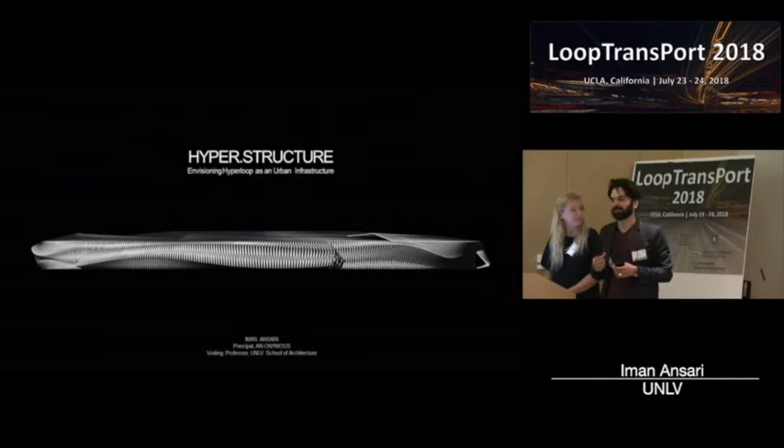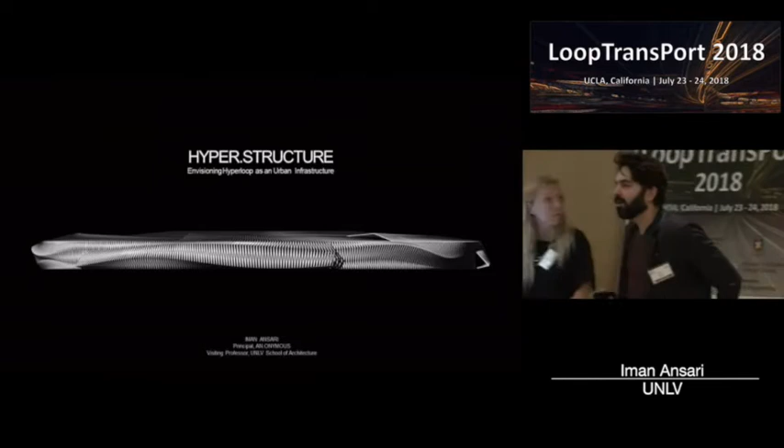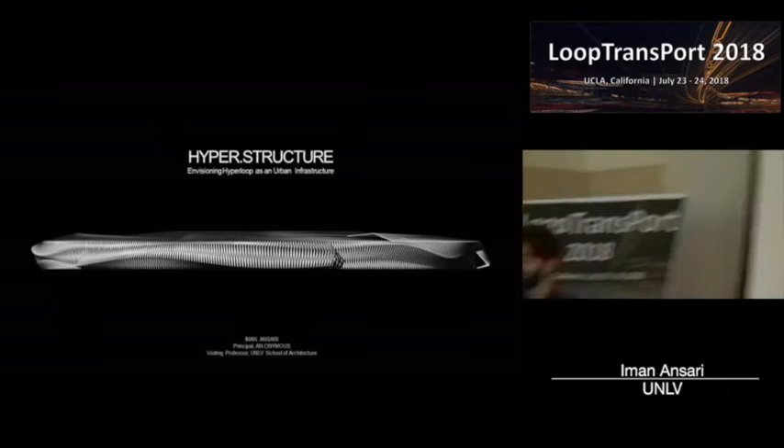I've seen a lot of great presentations today, and what kept me thinking is that it's a little bit strange for us designers and architects to be in a scientific conference. But I keep thinking about Heidegger, who famously said that unlike the notion that we have science and then there's technique to prove it, sometimes there is technique that would then lead to scientific discovery and findings.

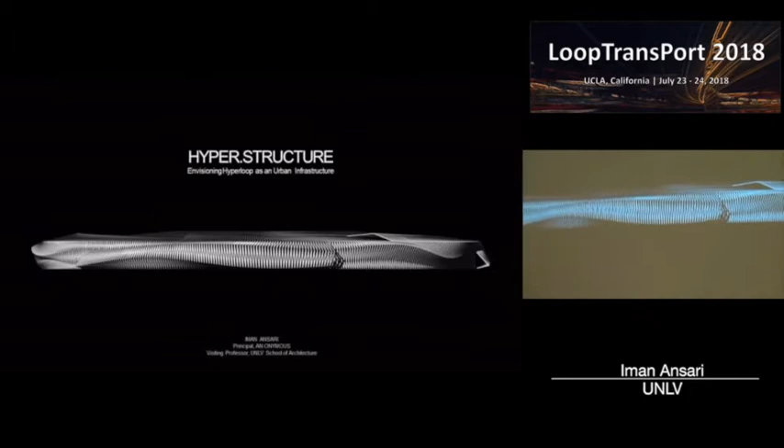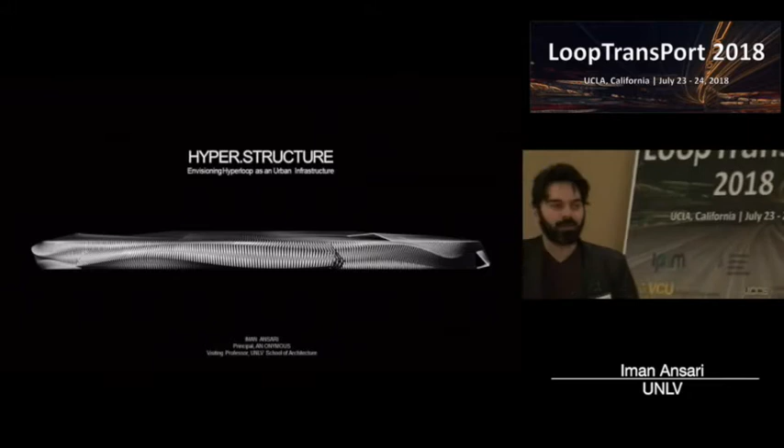So this has been our approach at Anonymous as a transdisciplinary design firm, to explore this narrow realm of techniques, and that has enabled us to work with great companies like NASA JPL and more recently Hyperloop Transportation Technologies. So I want to begin with this image.

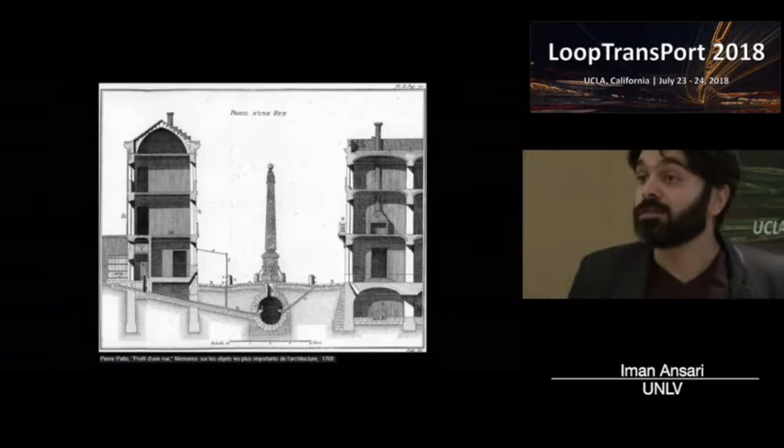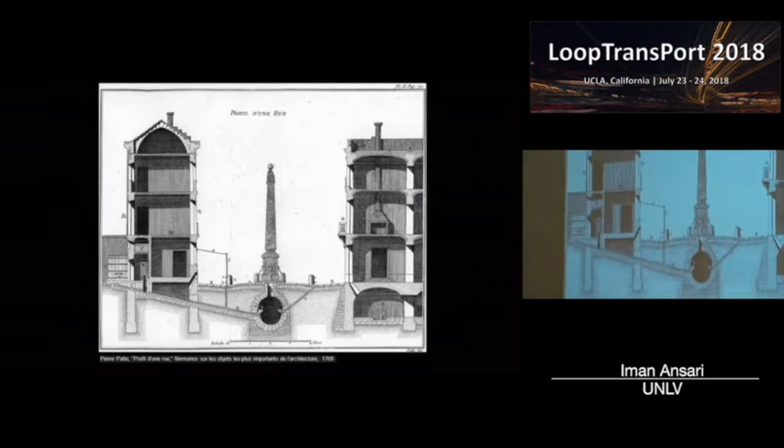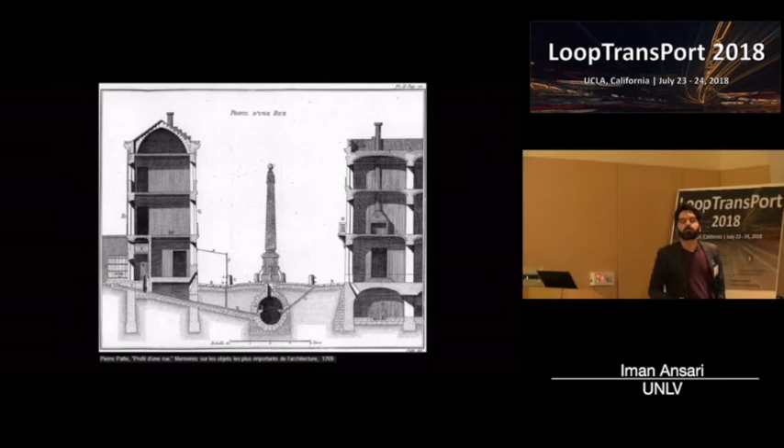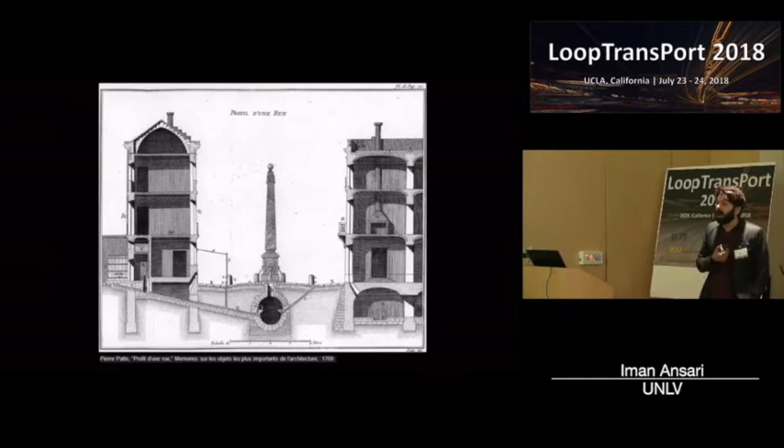By Pierre Patte in 1769, of what he called a street—not any particular street, not an existing street, but basically any street that he envisioned back then. Patte thought, well, if we have circulation on the street of people and carriages and vehicles, how about we also produce a completely separate and autonomous system of circulation underground for water and sewage that can even connect to the buildings and tie it all together in a system. It took 100 years after this drawing for this to be realized.

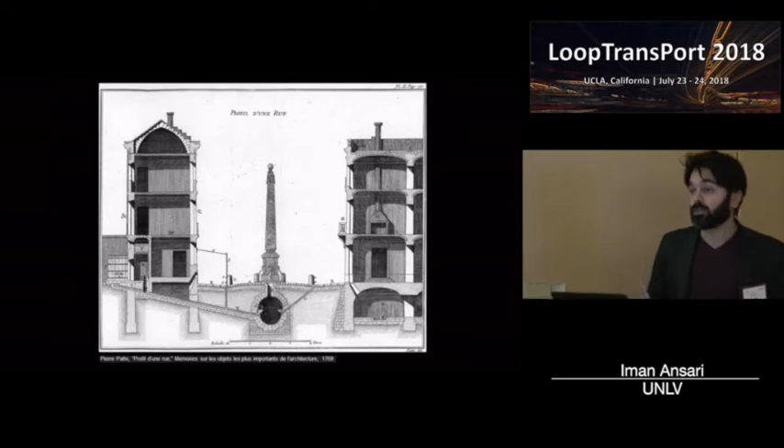But we see the idea of something like a street that already existed, but beginning to be thought of as an urban infrastructure. And since we started working with Hyperloop Transportation Technologies, we thought of Hyperloop in a similar way: instead of coming in to make it look pretty, our job is to rethink what Hyperloop is beyond just a mode of transportation and mobility.

So beginning, we worked on a number of separate projects with HTT, and one of these was the task of rethinking and redesigning the pylons, assuming that the tubes are above ground.

So early on we thought of approaching the project, and we called it Hyper.structure, so that the idea is not that we think of pylons just the same way as the elevated highways of the 1950s and 60s have been, and we know what happened to that. But we really think of it as a new urban infrastructure that could bring new forms of life.

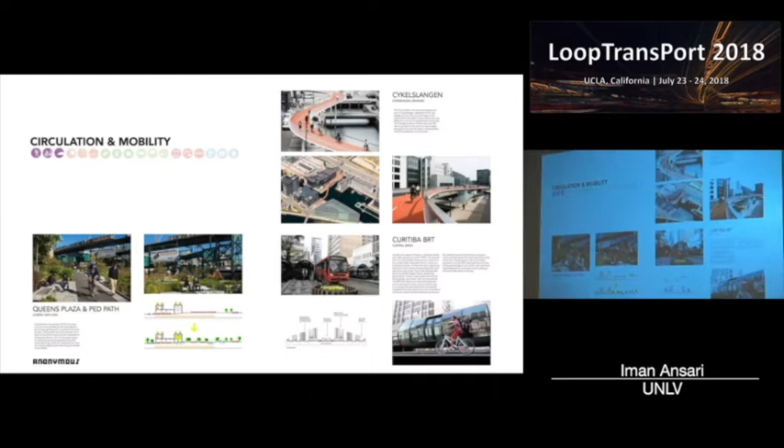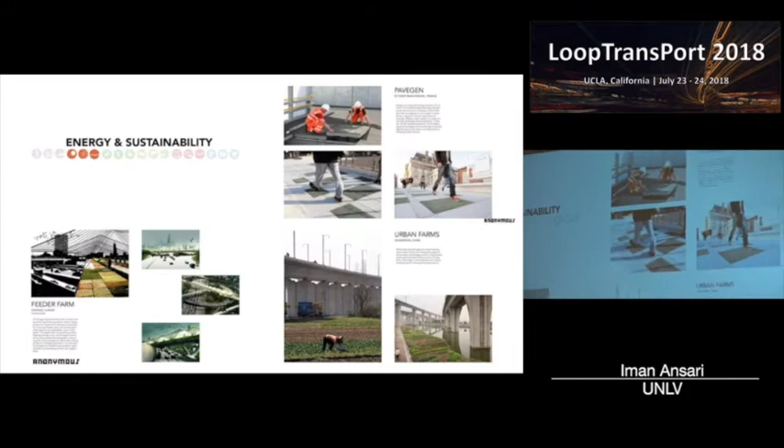So we started researching, looking at different aspects that we were interested in, from circulation and mobility, which is the obvious one, to energy and sustainability. We looked at separate projects, how to even generate energy from pedestrians moving and walking. We looked at program and economy and how to activate spaces, green and urban spaces.

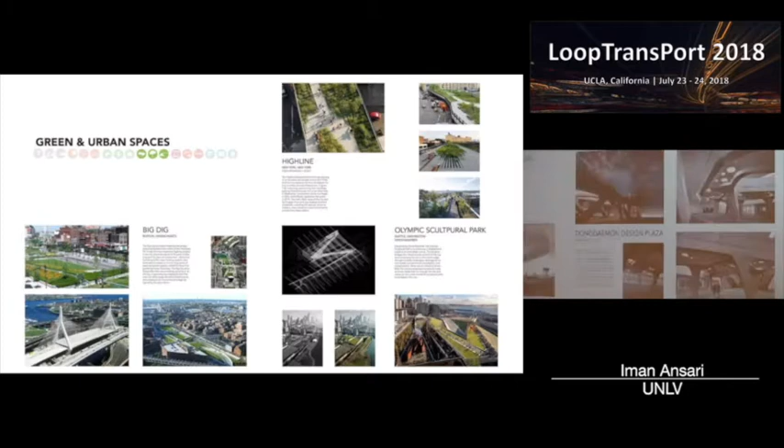How could these spaces become more positive public spaces in cities? The idea of structure and infrastructure itself, and how that could function.

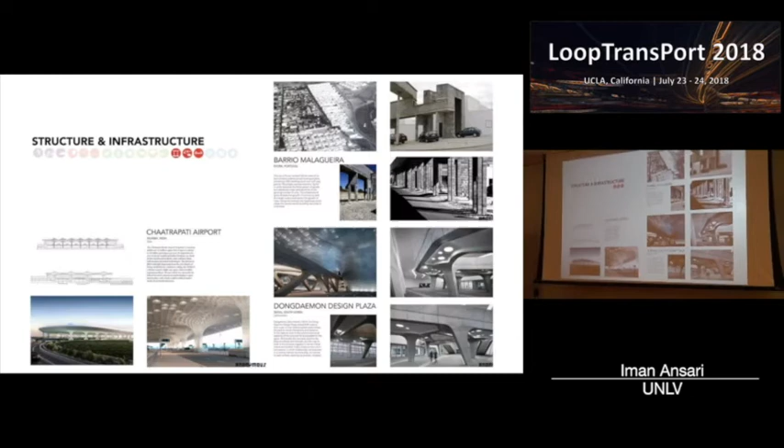We have case studies here in Portugal, where a city was developed by building elevated infrastructure that carried pipes and electricity first, before there were even any homes, and the homes were built by just plugging into it. So in a way, you can think about the pylons and the Hyperloop tubes in the same way, as a means for future urban developments.

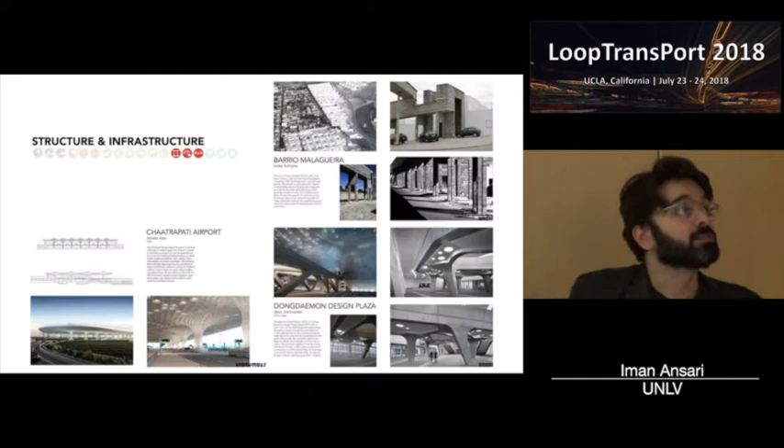Also culture and community, and how these spaces could foster that.

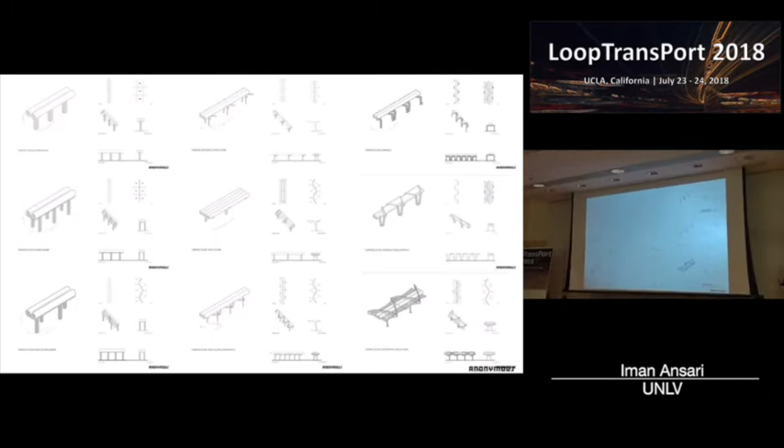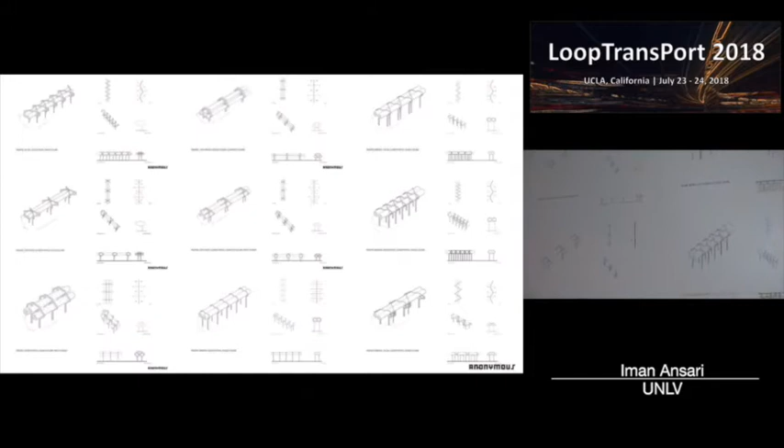And then we started going through very long design explorations, looking at the implications of what the pylons mean if they are elevated: if we have one single column in the middle, if we have two, if they're shifted, if they're aligned, if they're misaligned, if they're zigzagging, if there's two tubes, if there's four tubes, if there's pedestrians on top, if there's pedestrians below, and so on. This goes on forever, and I don't have time for it.

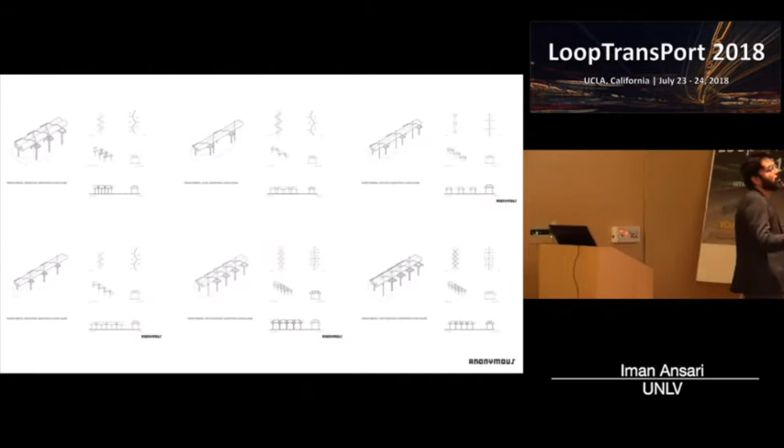But we finally honed in on the schemes that we thought worked best, both structurally and in creating better spaces.

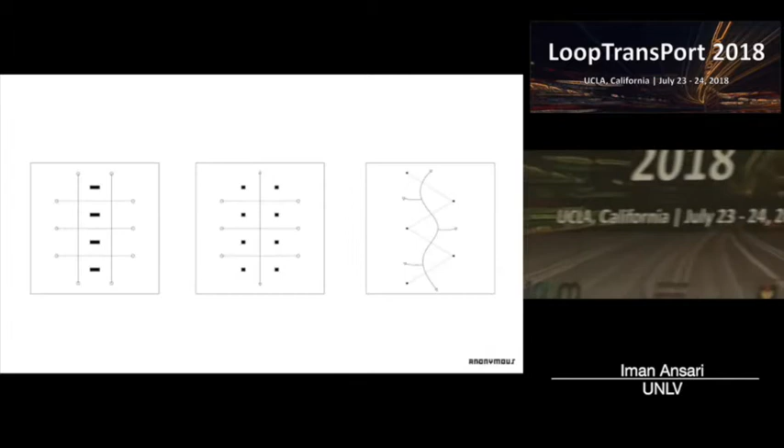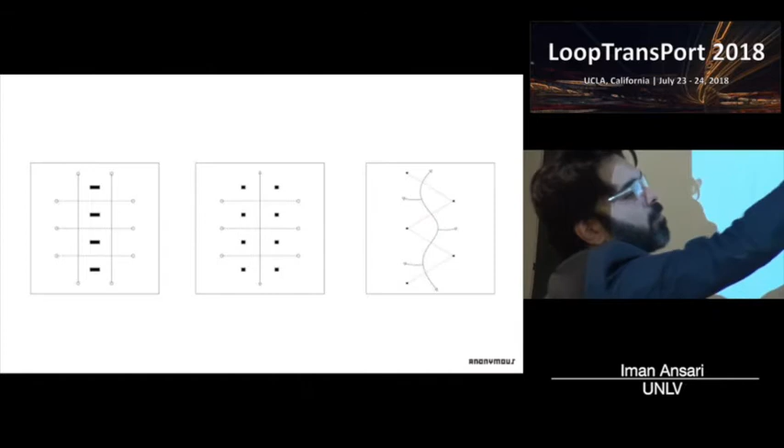The key discovery, looking at pylons in general, whether it's Hyperloop or highways, is that when you have columns in the middle, much like the highway systems, you end up with leftover spaces on the sides and these sort of corridors that lead to nowhere, which is why they end up being dead spaces in cities. The moment you double them, you still have these passageways, but at least you create a space below.

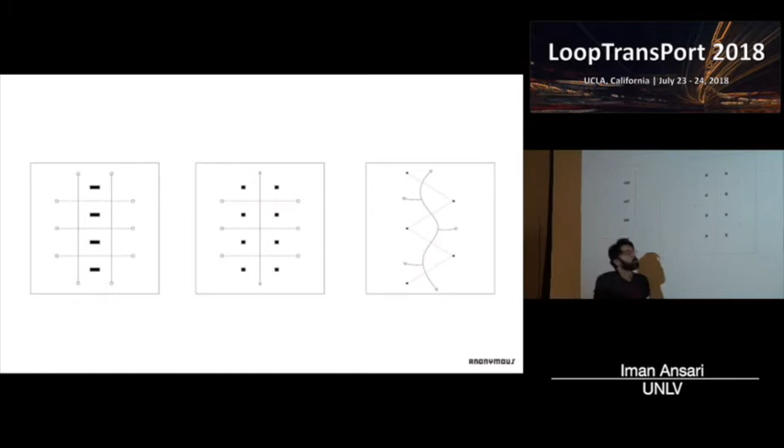So by shifting that, not only do you maintain this corridor, but you also start to create spaces on either side, potentially using it for programs and activities. So this is basically two of the schemes that we developed.

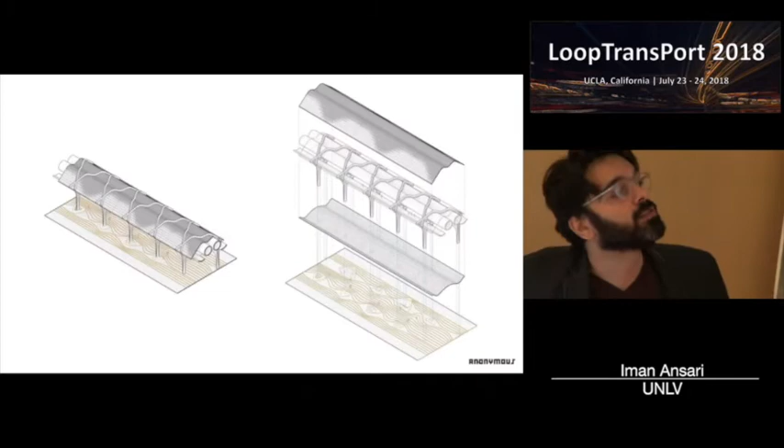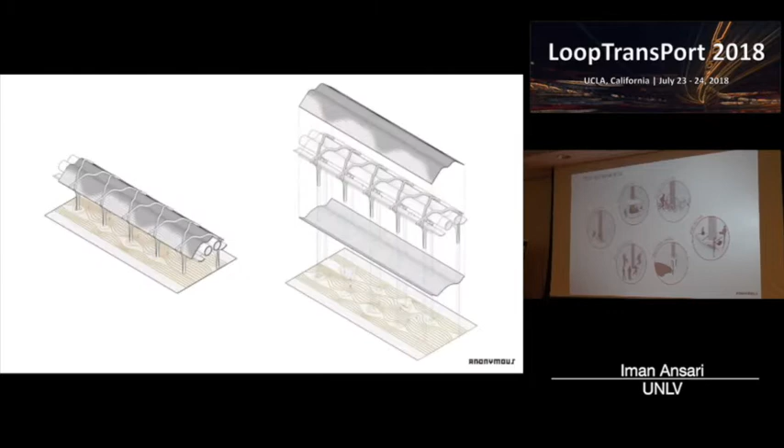I'm going to focus on this one, where you see the tubes here, pedestrian passageways that would connect directly to buildings, and public spaces and programs under the ground. Again, the whole thing could be wrapped around the skin, which could then be solar panels or green screens, bringing all these different activities and functions together.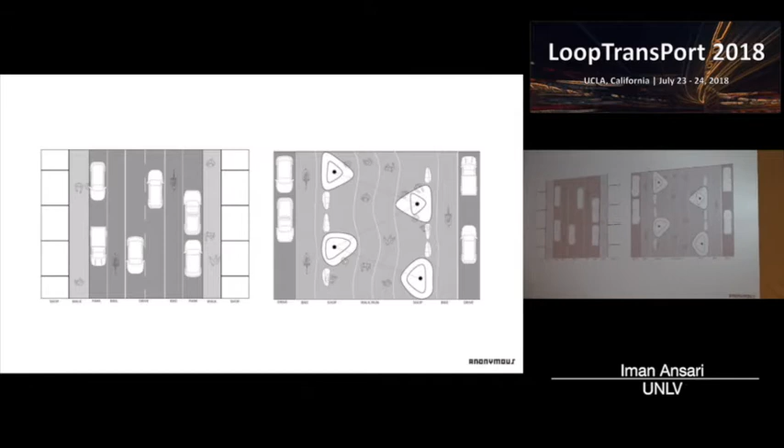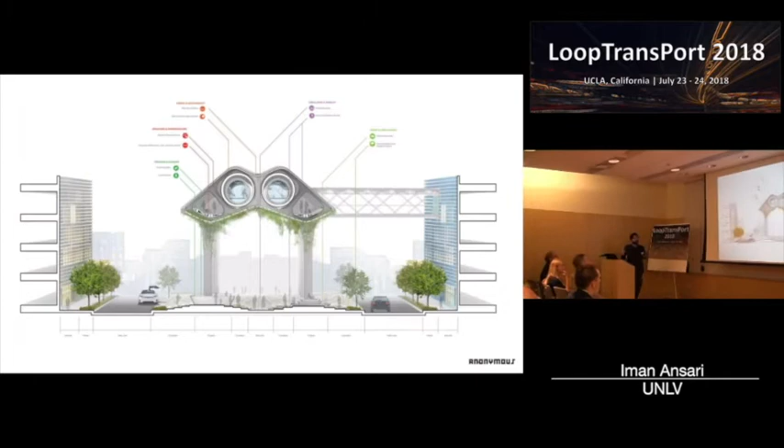Looking at how this could improve streets rather than being an obstacle added to a city, there would be an incentive for planners to even integrate these tubes. To rethink Pate's drawing, we could start thinking about these zones as a new place for infrastructure. We're arguing for above ground because it's more accessible, easier to maintain, and you can add and remove stuff, especially nowadays with telecommunication upgrading almost every month. Here's an image of what those spaces could look like.

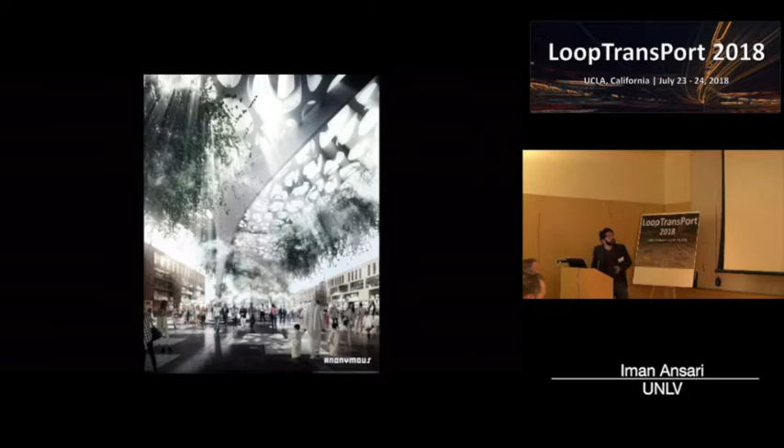We also looked at the interior of the capsule. In a way, it must be a claustrophobic experience to be inside a space that is so small with no windows. One approach is a more conventional approach we're familiar with, imagining almost any mode of transportation today, and integrating digital screens.

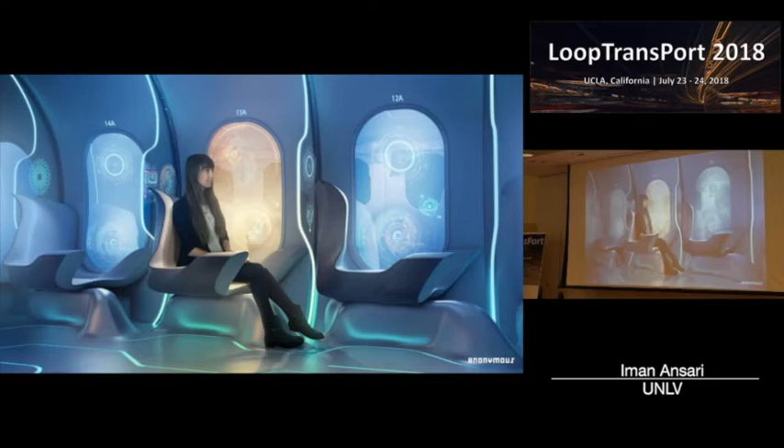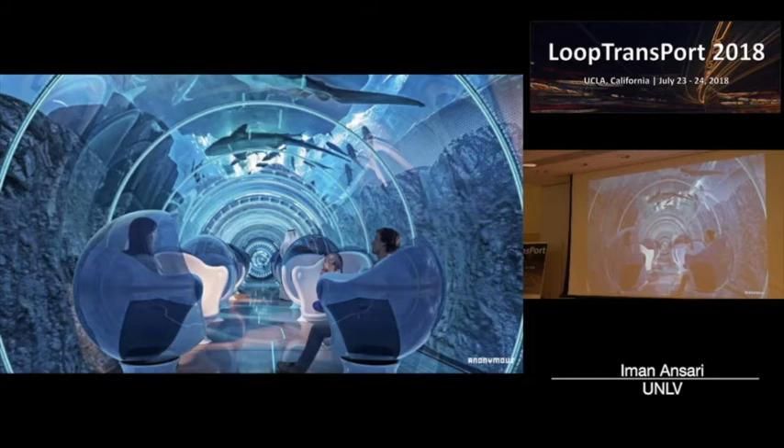Another is to actually take advantage of the fact that there are no windows, so we can produce a more immersive environment where you can be anywhere and experience it with your family. And a more economic approach, which is a problem.

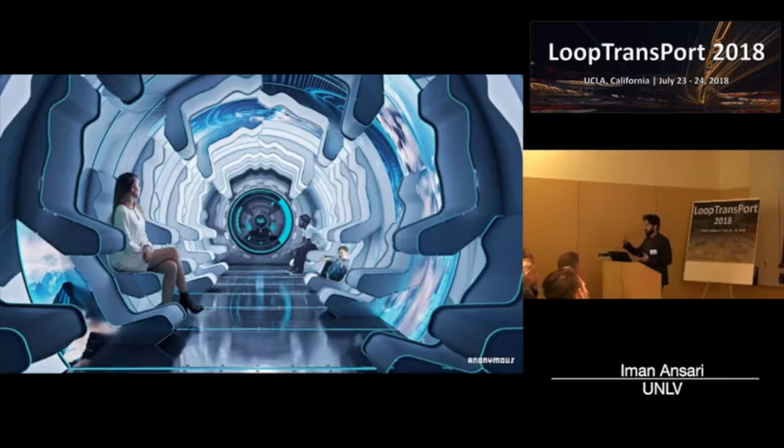I'm from New York, most of my life lived there. If you go on any subway in a city, you start to experience the problem that the seats are designed for a certain size and age, and some people like leaning, like me, on the door, even though it says don't lean. Also, when no one's sitting there, you have to stare at an empty seat, which is kind of sad and ugly.

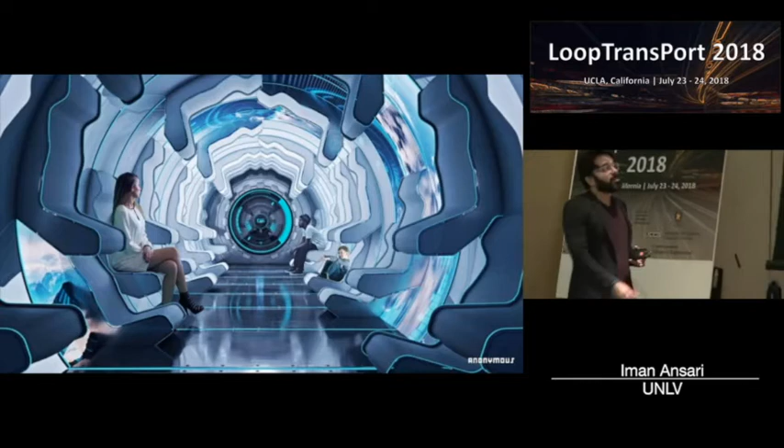So we came up with this idea of using the circle to rotate the seat so you can adjust it to your height, lean on it, and if no one's there, it just rolls onto the ceiling, and you have a screen there for whatever, advertisement or entertainment.

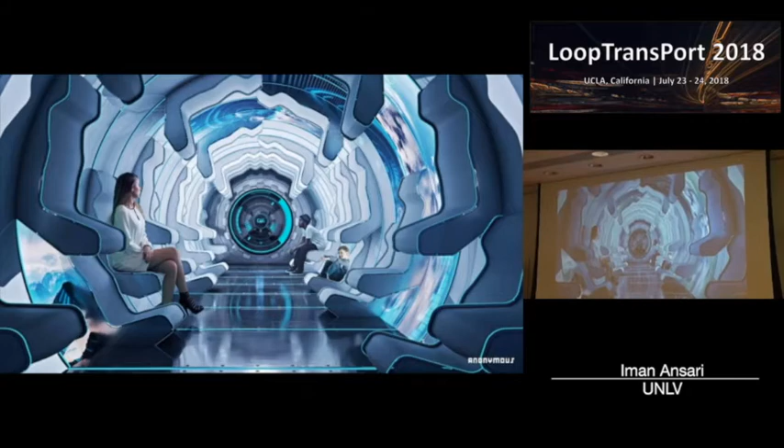But most of our time we've been looking at the design of the stations. If you consider the scale of the stations, they're pretty large. Based on our calculation, you come close to the size of the Pentagon, which is big because of the turning radius required. So for us, the stations were more than just a building, more like an urban design project.

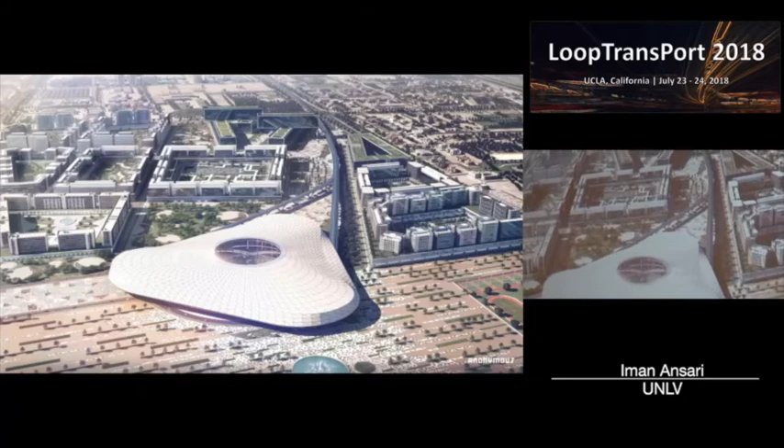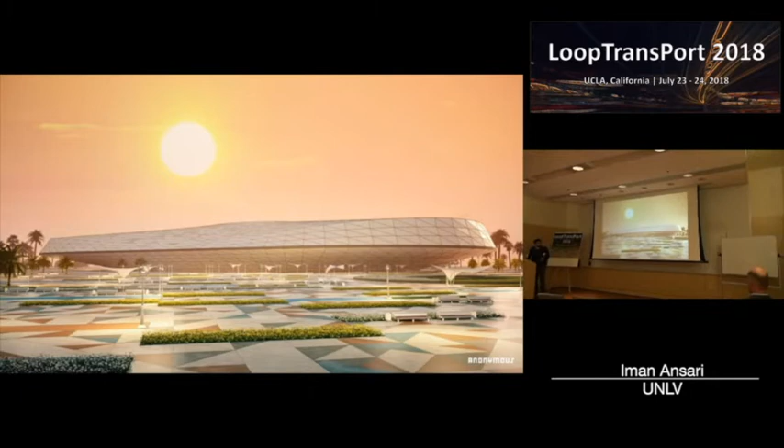So we did two stations, basically two terminal stations, one in Al Ain, with a different view of this, and another in Abu Dhabi. We conceived the way the station works, and there's really no precedent for it, obviously. It's like being asked to design an airport before there's even an airplane. So for us, this was a great opportunity to really think about how we would like the travel experience to be.

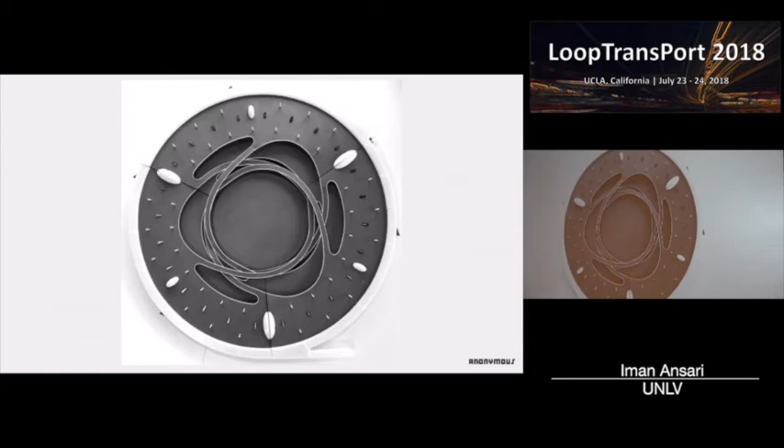For us, it was about the idea of having a no-stop station, so you don't pause, especially nowadays with security and all this sort of waiting. We wanted the Hyperloop, if it is a high-speed transit, it's not going to work if we have to wait in line for like half an hour.

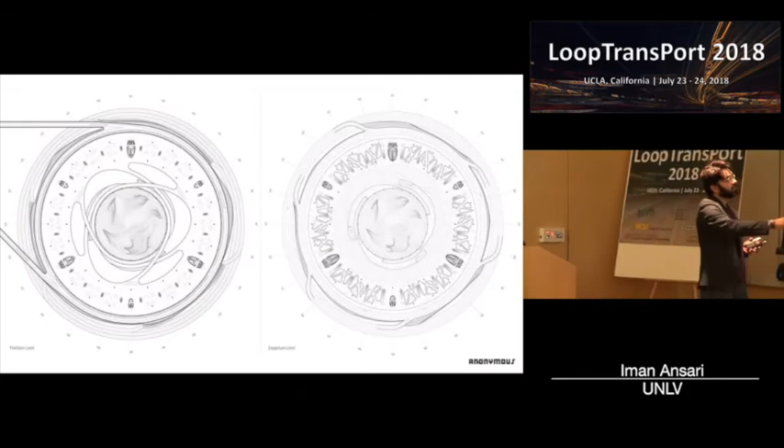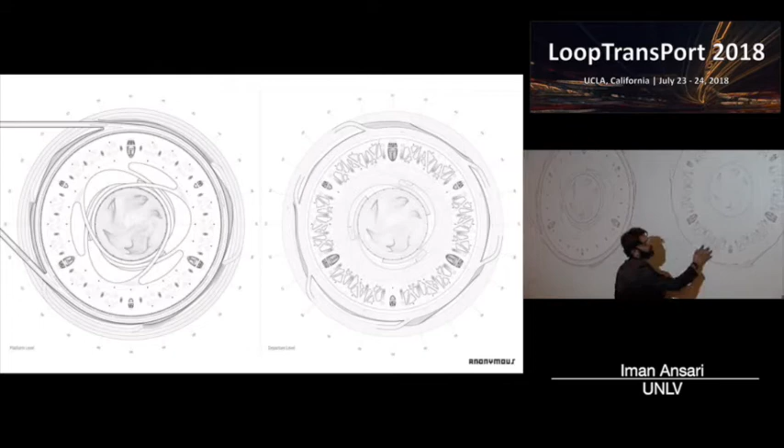So the way we conceive the station, let me quickly explain: you have a drop-off level, and then depending on wherever you are dropped off, there are stores and duty-free, and you're filtered through here into this zone.

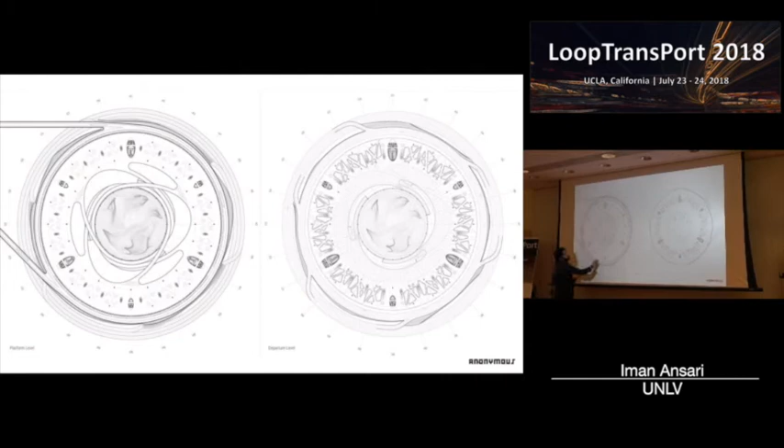On the floor, there are three zones really, based on your ticket you're given zone A, B, or C, and you have signage guiding you to one of these three ramps. Based on which zone you are, you get onto that ramp, and it already brings you up to that zone, which is a third of the circle, and by then you already see your gate.

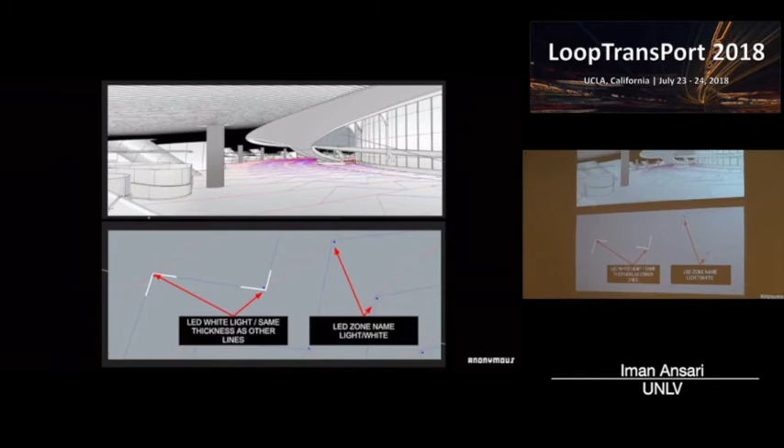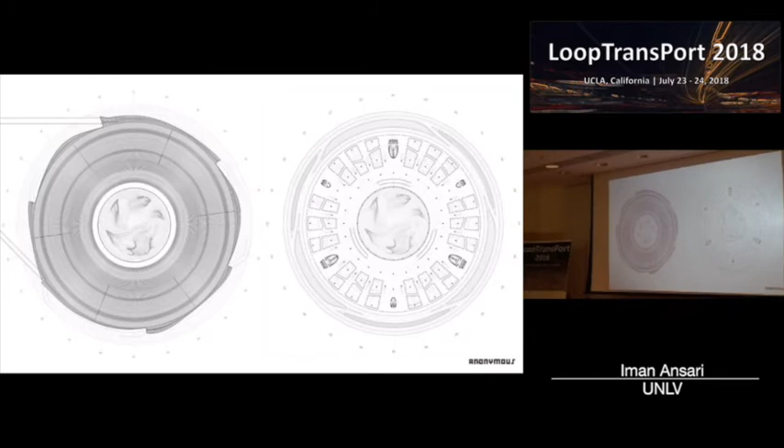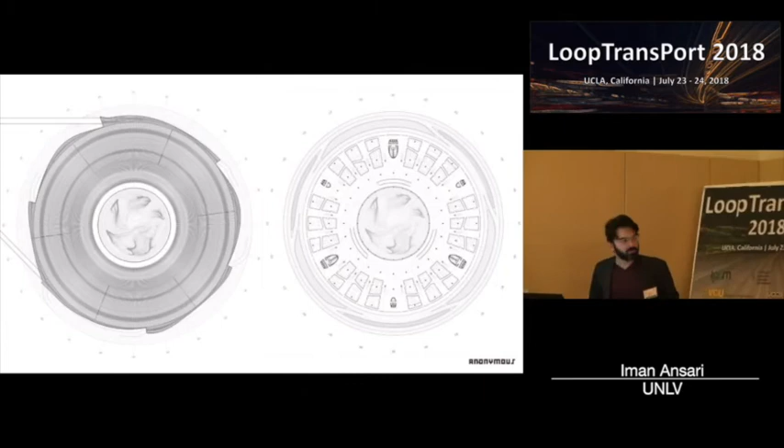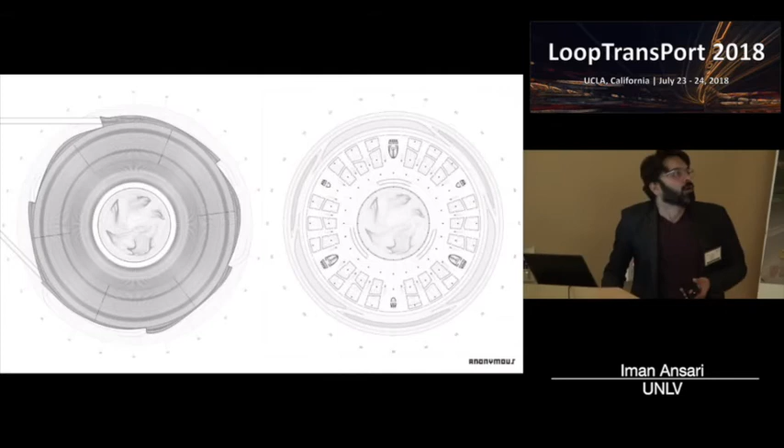A view of the skin and the level below, which we thought would be open to the public with commercial and other public activities. The skin is really a porous skin - even though it looks strange, it's not just decorative, because it produces openings where the building is open to ramps or tubes. That produces the undulating surfaces. If you unwrap it, it's about 1 kilometer long, which is another reason it doesn't make sense for it to be an actual building skin - it needs to be more porous.

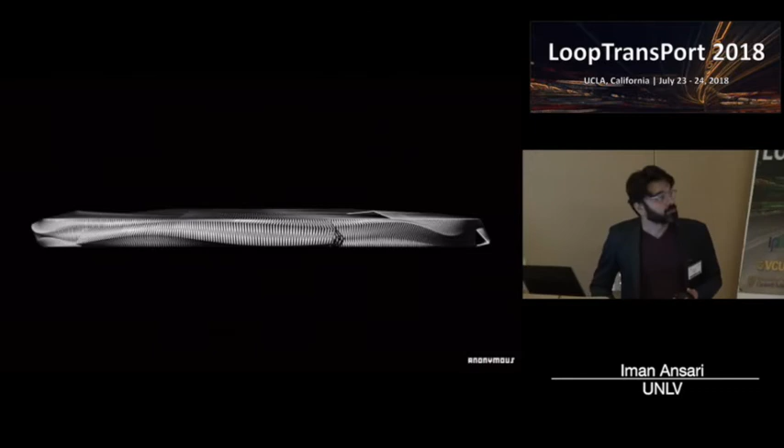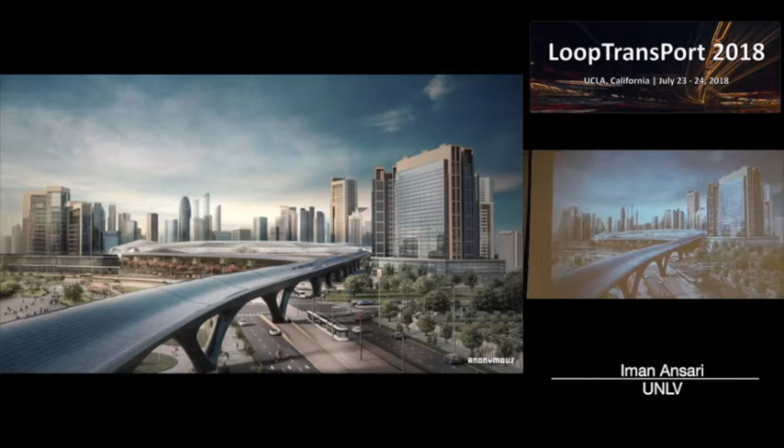That was supposed to be a video, but it didn't work. Anyway, you start to see here the car ramps and tubes that penetrate through the skin to create openings. Here are different views - because of that, from any angle, the skin looks different.

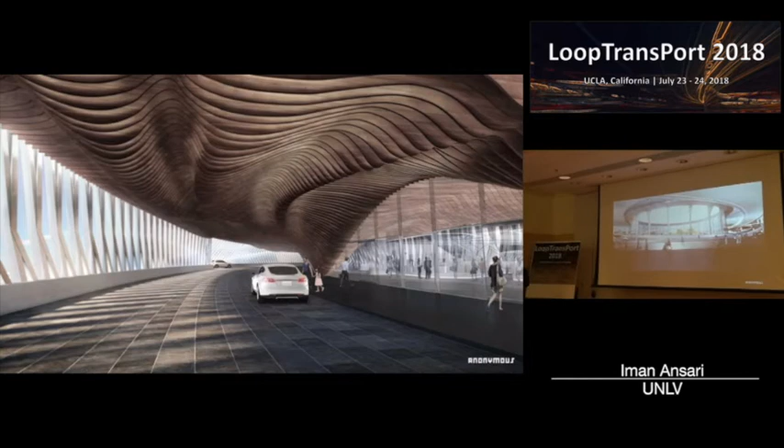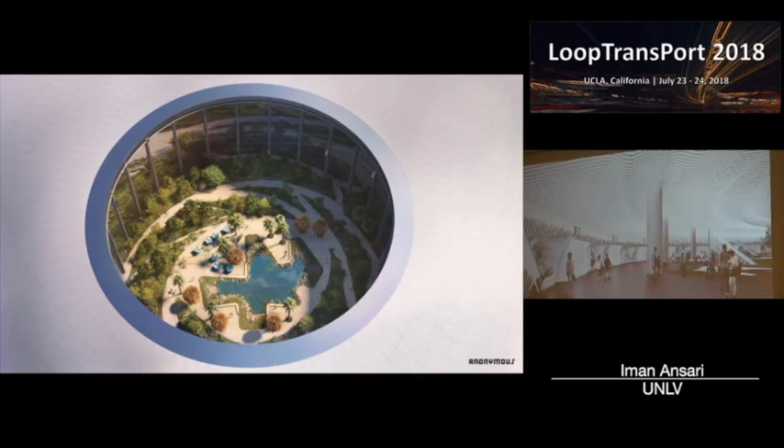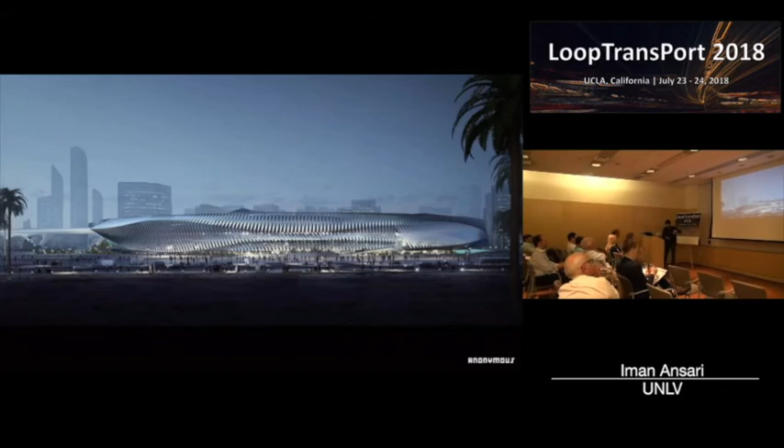So the question is why the station needs to be so enormous. The easy answer is we're given the parameters by the client, so we have to do it. But the correct answer is that these were terminals, and the turning radius for the tubes needed to be a certain minimum. So this is the smallest we can get.

So are you suggesting - when you said elevated in Manhattan, they have a very successful park known as the High Line, an old transportation system turned into an above-ground park that's been extremely successful - are you suggesting the Hyperloop's right-of-ways in a city would be park-like? The question is if our vision of the pylons is similar to the High Line in New York. That's certainly what we hope for if there is going to be an above-ground system.

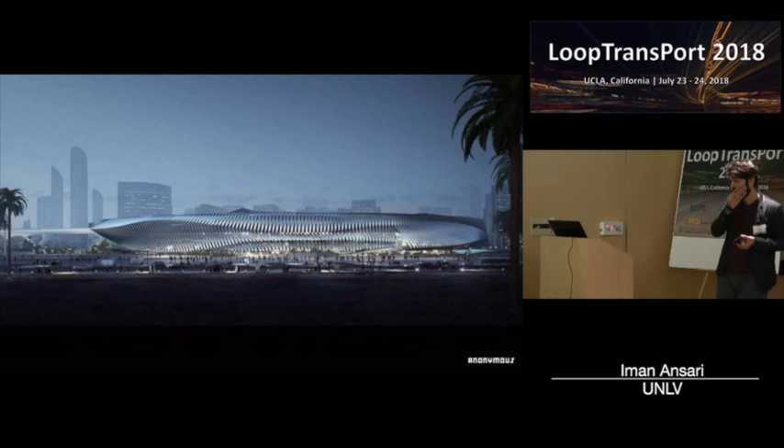And it is large, so it is definitely expensive. But we're really focusing on what it is inside - how to make it work within those parameters and make the experience more interesting.